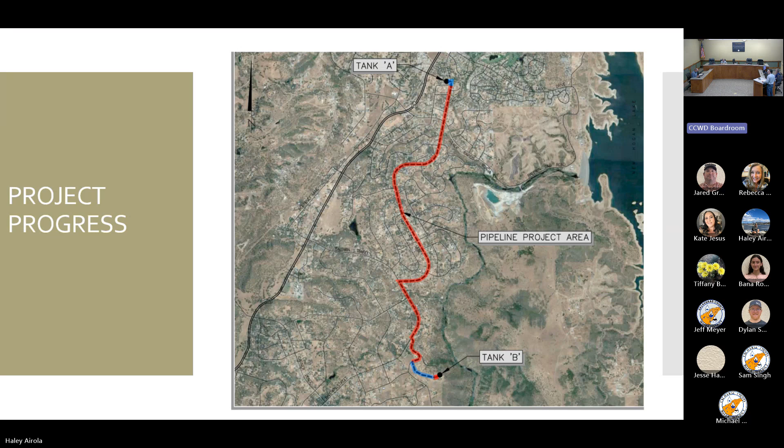I'll start by giving a plan view of the project progress. Here we can see in the profile of the main line that the red is pipeline that has been completed and installed. We have roughly around 92% of the main line installed. At the A tank, to the left, it's like 1% left, just a tie-up. It's 168 feet that we have left to do over there.

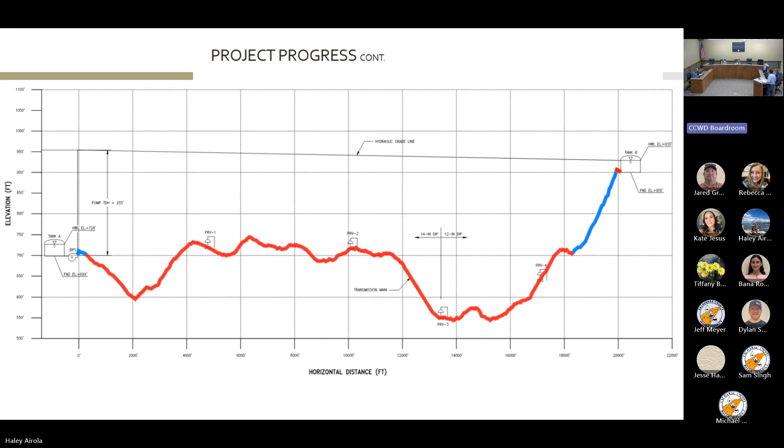And then to the right, we started the progress from B tank down on Wind River Court, which is really narrow. With that said, we still have quite a bit of work ahead of us since we have a couple concrete vaults that we need to install, and then the connection of the PRVs and testing, plus the service lines, 210 service lines coming up, plus the paving that I'm going to talk about in a later slide.

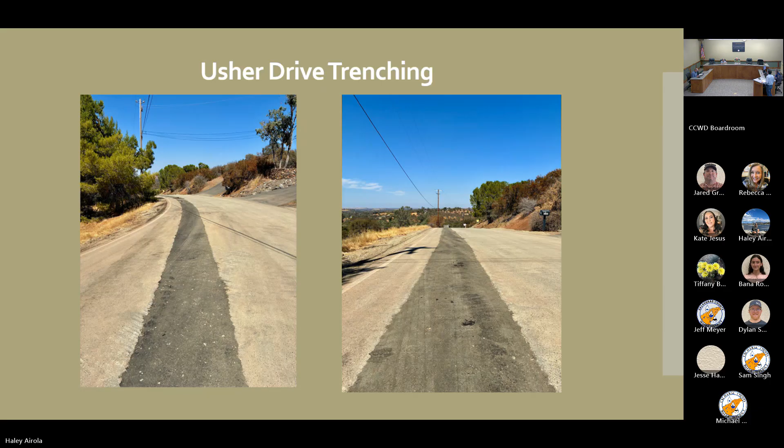I'm going to start off with a positive note. We finished Usher Drive. That's roughly 2,800 feet where we did not encounter any rock, believe it or not. There was one big boulder, but outside of that, there was no rock in the trench. As you can see, the cutting of the asphalt is very clean, and that's been pretty smooth. Now we are at Wind River Court, and in the image in front of you, you can see that it's pretty steep, and it's also a one-lane road.

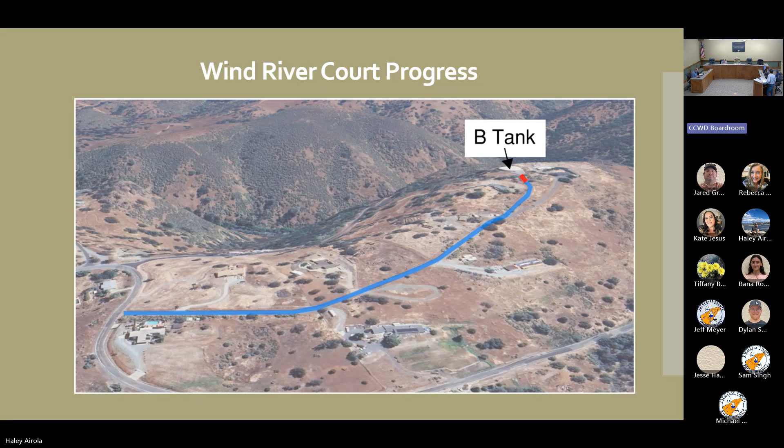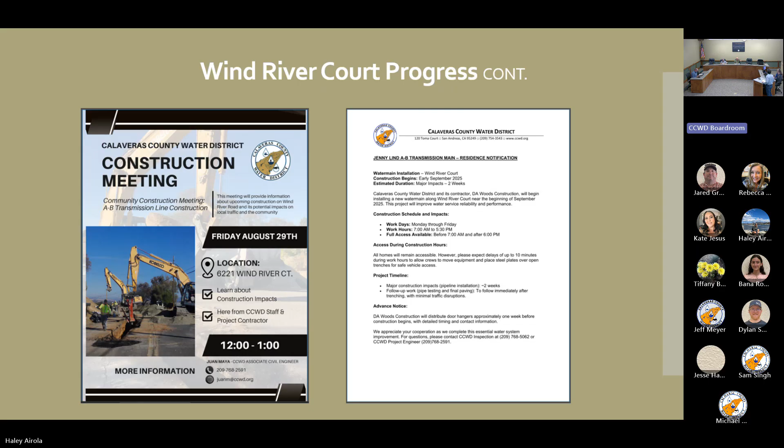So we held a construction town hall meeting with the residents of Wind River, since it's a one-lane road. And we included the Calaveras County Office of Emergency Services, DA Woods the contractor, and us, the district. We went over emergencies, not escape routes, but if the residents need to come out, how long it's going to be, and then just a traffic plan for that.

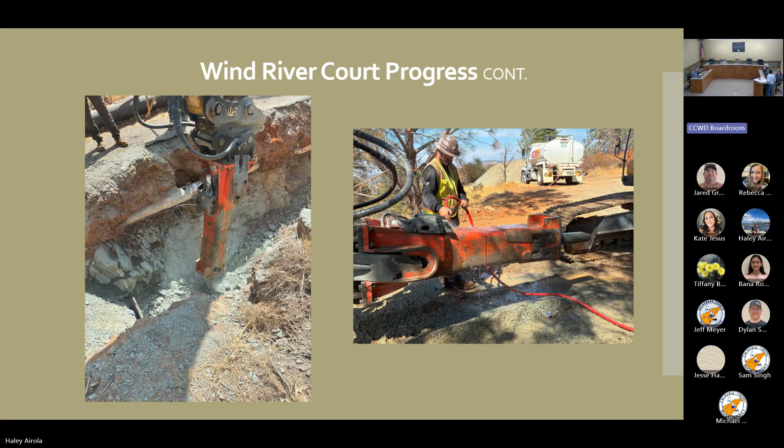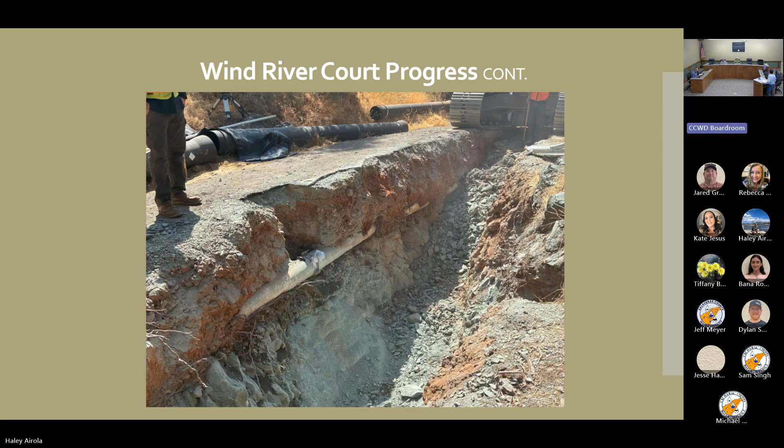And I took this image just to show our existing 8-inch line coming off B tank is literally laying on top of the rock. So when they installed it in the late 80s, early 90s, I don't think they wanted to go through what we're going through right now. So they just put it flat on the rock and covered it. And since it's only a one-lane road, as you can see, we're digging right next to it. So that's another challenge.

So after we get the main line installed and the PRVs, we're going to move on to doing the service lines. To do the service lines, we need to have isolation valves to be able to break down the different zones, so we can minimize the shutdowns for the residents while we do the service lines for their homes. Just want to show you that.

And with that said, I'm going to move on to paving restoration, because it seems like every road that we have gone through, we have to do some sort of paving. I'll start from the top where we are right now at B tank. Wind River is going to include a 2-inch pave, full width of the road. Then we're going to go into Usher. Usher is going to include a 2-inch overlay, one lane. Then Baldwin is going to receive a 3-inch pave, one lane.

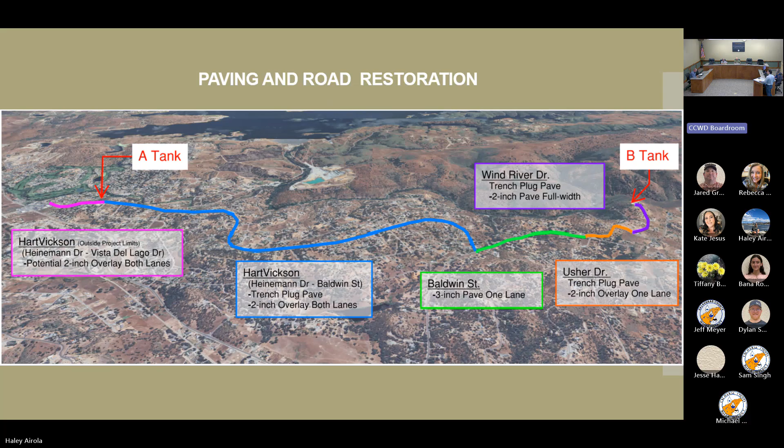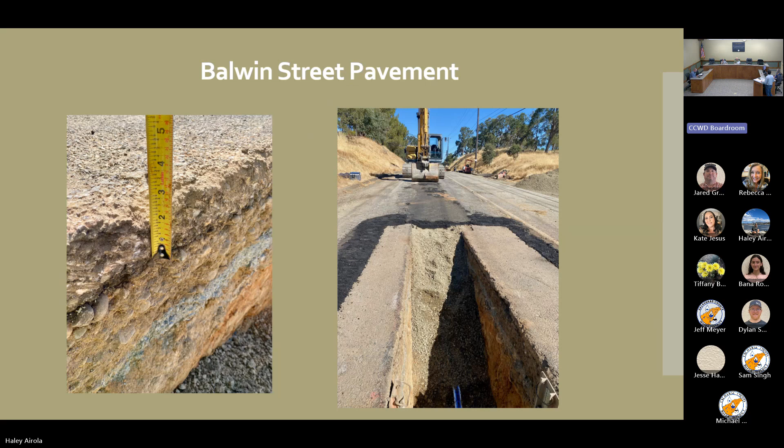Baldwin, we're having a 3-inch pave, one lane, because during the trenching process, we discovered that on Baldwin, at least the 3,200 feet where we installed the pipe, the asphalt thickness is actually 2 to maybe 3 inches on average. So if we do a 2-inch overlay, the teeth of the grinder are going to go about a half inch past the 2 inches. So it's not going to leave enough pavement surface to do an overlay and make it stable. So we decided to go with a 3-inch pave. And that's all I have for this presentation.

Jared, do you want to add something? No, I'm good, unless somebody has a question. You have anything, Russ?

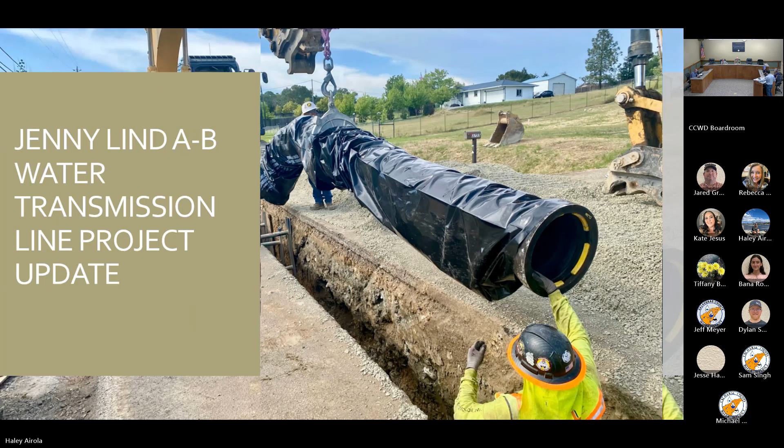Okay. All right, anything else? No. Anything from the public? All right, thank you.

Okay, Section 219 grants update. I'm filling in for Alex. He was planning on doing this presentation last week, and then had a pre-planned vacation this week. So we're talking about the Army Corps of Engineers Section 219 grants. It's the same program that the Copper Cove wastewater treatment plant pond enlargement and tertiary treatment is funded under.

So the background, we talked about this project previously, but the existing infiltration gallery is outdated. It's in the bottom of the Calaveras River. So this project would relocate the raw water intake to New Hogan Reservoir. And incidentally, the Army Corps called me this morning about this project asking for more details. So it sounds like the local Sacramento Army Corps of Engineers division is going to recommend the project.

So that's really good news.

Wow, that's great. So, problems with the flooding, sediment, and algae blooms, poor water quality that we get in the Calaveras River. The gravel pad gets destroyed when there's high flows. Low flows reduce the plant capacity. There's a lot of algae that gets caught up in there; there's a mat that can form on top of the intake that causes problems for us. And we don't have any control over how the Army Corps of Engineers releases water from New Hogan.

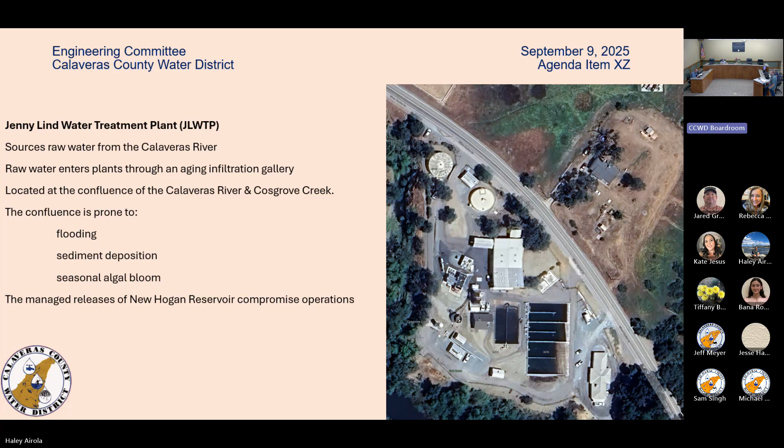So this kind of fits our treatment plant here. And we got the infiltration gallery where it's located there by the treatment plant. We talked about the high flow and low flow, the drought conditions that cause problems.

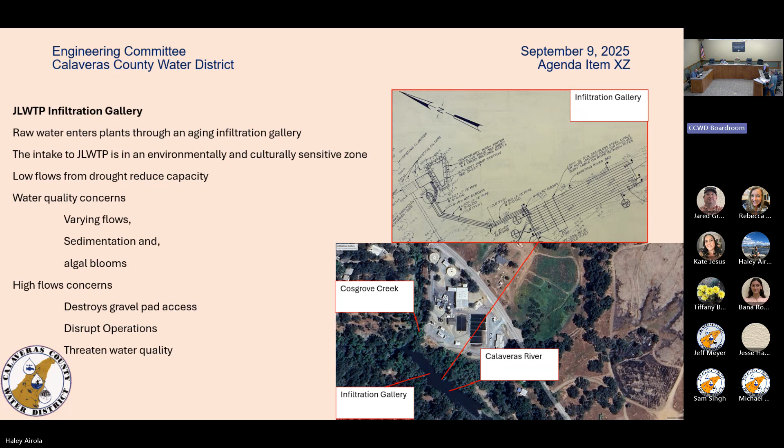So alternative A, we talked about here, that'd be taking the pipeline down Hogan Dam Road and then going past the dam, up and over an embankment and down into the lake. From there, we'd have probably two stage pumps, one at the low level and one up higher, so we wouldn't have too large a horsepower there when we don't need it. And we'd probably do above ground piping up the bank of the lake.

What elevation would the intake be at? It'd be down at the low pool level. So I think a few years back, the level got really low. I don't know exactly what that level was, but there's an existing concrete dam that's built within the larger dam. So we're contemplating possibly mounting the raw water intake on that concrete dam because where it comes to is right where the access slope is.

So the Army Corps used to have their own raw water supply there and a pipeline going down into the reservoir at the same location where we're proposing to put it. So there's already, not an easement, but there's already a pathway down to the bottom of the reservoir, and that was in place when the old dam was there. So it's down at the low level water.

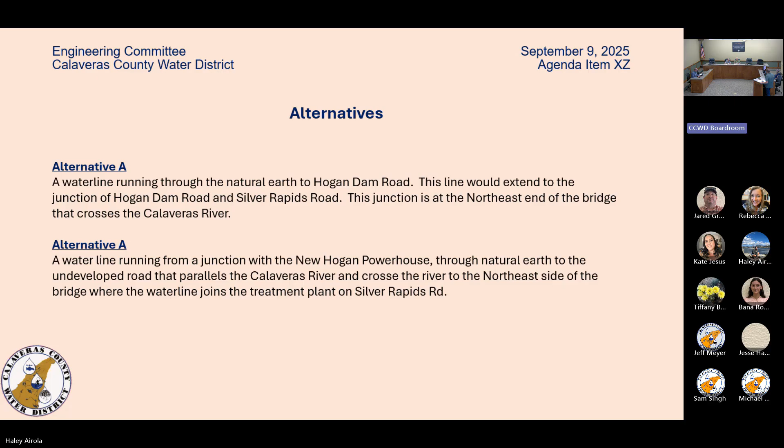On here it says alternative A takes this thing above ground. There's going to be an exposed pipeline coming up right below that picnic area where they have the parties, and then going back down, as opposed to coming in at the base of the dam. You eliminate all that above ground pipe plunging down into the lake. How much trouble are those pumps at Lake Tulloch?

Yeah, we're proposing similar pumps. From what I understand from operations, they haven't been that big of an issue. They're vertical turbine pumps laid on their side, so we were proposing a similar configuration. But here we're proposing two different alternatives. Are we going to look into both of them? We'll be looking into both of them in more detail.

As far as A and B, why it became B is because we thought we had to abandon the hydroelectric facility and deal with FERC in the abandonment, and then not having a hydro facility there anymore, which may be a good or bad thing, depending on how you look at it. But as we dug into more details, we found out there could be a possibility to install in a third gate that they don't normally ever use. So that's when it became a better alternative, but still unlikely that it would be approved.

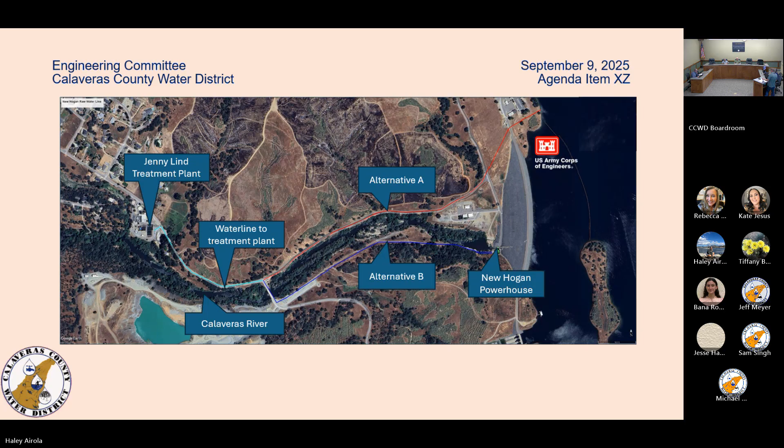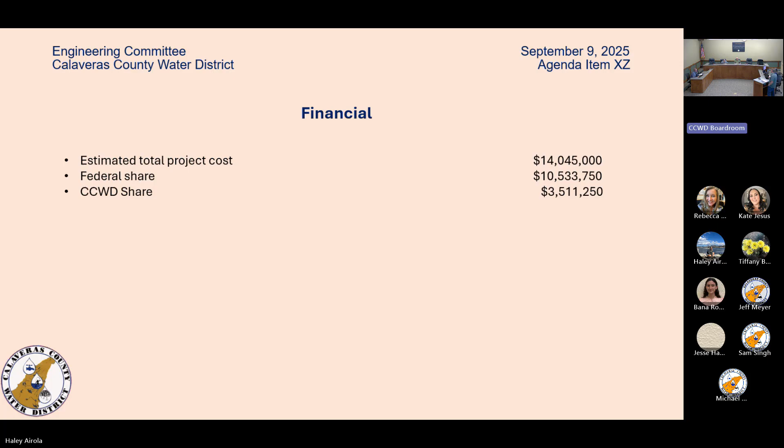Okay, where are we? So here's the financial cost. We estimate it at $14 million. So we'd be responsible for $3.5 million of the cost. This project was on our 10-year outlook for the CIP. It wasn't in the 5 years, so we think by the time this comes along, we'll be in that time frame anyway. Let's hope. That's assuming we don't have to do anything with the present source of water in the river for the next 10 years.

We've got a lot of problems with our infiltration gallery now. But that's what was in the CIP, and that 10-year outlook was addressing the infiltration gallery. What we're trying to do here is replace that with this project instead.

All right, are you satisfied? You got your way. Well, I got my way. It's the first time ever.

I think I'm hearing you say that you don't anticipate that this either A or B will be approved for the next 10 years. Is that right? No, a few years, I think it's a 3-year process at best. I think what he meant was we wouldn't get into construction until we're out beyond this 5-year financial plan that we're in right now. And based on past experience with this program, I think that is a safe assumption.

Okay, but in the meantime, how many thousands will be spent on the infiltration gallery, the one we have? They do yearly flushings and maintenance on it, so luckily we haven't had major repairs in the last year or two, but there's some broken valves on it right now. I think we're down to our last valve before we're in real deep problems, so that's where we're at right now.

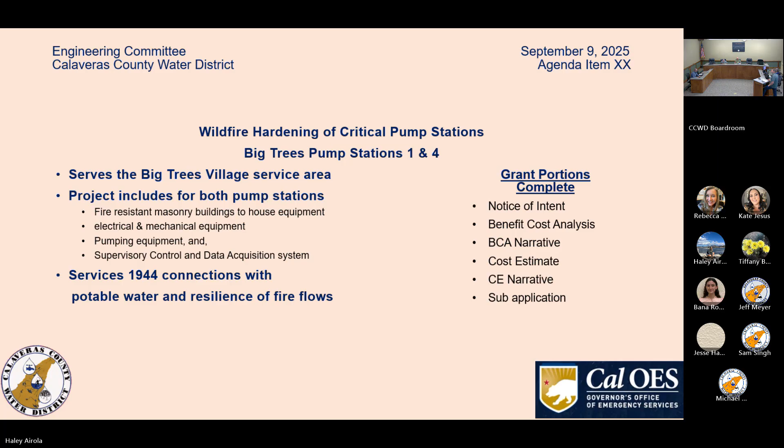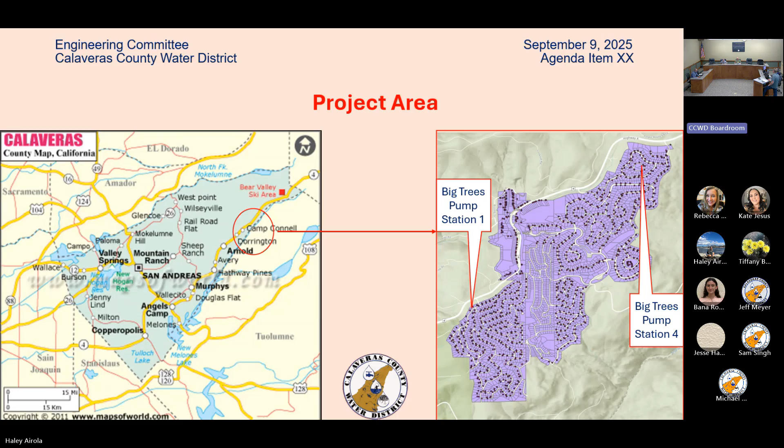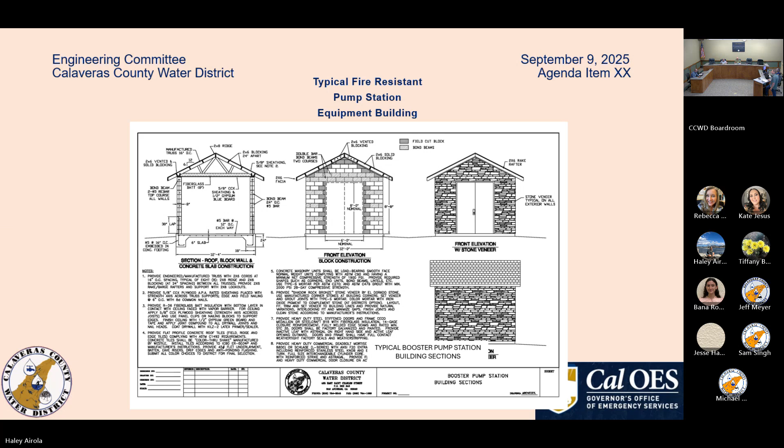So we'd be building a masonry building similar to Dennis Court pump station, probably not with the rock design on the outside.

So the original estimate, this is where we pared down the grant application to try to attract funding. When we started going through the BCA and the numbers weren't working out well in our favor, and also having to get to the 60% design level before they'll award the grant.

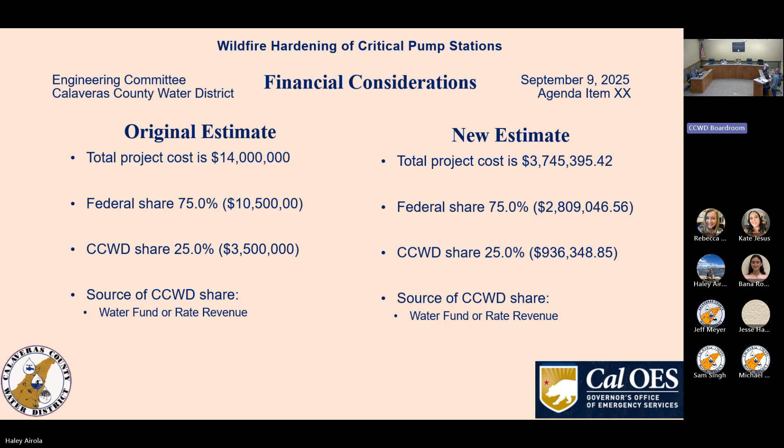So our water fund has CIP for one of these pump stations, so that would cover our share.

I don't know if there's any questions on that project, but Alex did a great job submitting that application, and I think we have a really good shot at getting a grant.

Right, great. Anything? Yeah, Kevin, this plan or the options for this little building, it's such a tiny thing. Have you looked into getting like a pre-manufactured building that just gets delivered and craned in?

Yeah, we did that at West Point. It was a challenge. Aren't they super expensive? They're super expensive. The masonry buildings are cheaper, and getting up the hill to our project site is a challenge, and there's no room for a crane.

Actually, the Reed's Turnpike pump station and some of the lift stations our developers are building, LGI Homes is building down for the North Vista Plaza, they're proposing precast buildings down there, so we'll see how that goes. But yeah, the West Point precast building was a challenge to get up to our water treatment plant through that windy road.

We've had some challenges with them. That's a consideration.

Because this is what I did for many, many years, the footing design for that thing, you could put a 5-story building on that footing. Yeah, there's substantial snow loads, especially up in Dorrington, but being a water agency, we do a lot more than residential as far as footings and stuff for equipment.